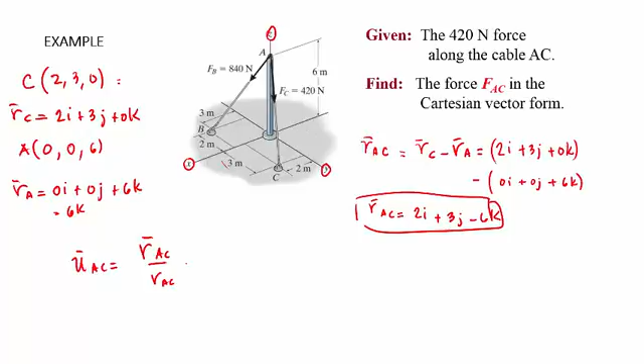Now I need the unit vector in that direction. U_AC would be that vector AC divided by its magnitude. So here I have 2i plus 3j minus 6k divided by the magnitude, which is the square root of 2 squared plus 3 squared plus 6 squared. This gives 2 over 7 i plus 3 over 7 j minus 6 over 7 k.

So this is my unit vector in the direction AC, and my force goes in that same direction. So my force vector would be the magnitude of the force along AC multiplied times the unit vector AC. This would be 420 times 2 over 7 i plus 3 over 7 j minus 6 over 7 k, and of course these are in newtons. So my vector is 120i plus 180j minus 360k newtons.

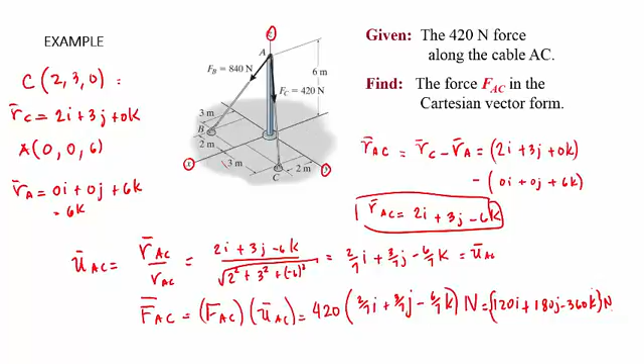So that's the first thing. Remember, whenever you don't have the vector but you have the magnitude, you look for a vector in the same direction as the force, find the unit vector, and then multiply the unit vector times the magnitude to get that force vector, okay?

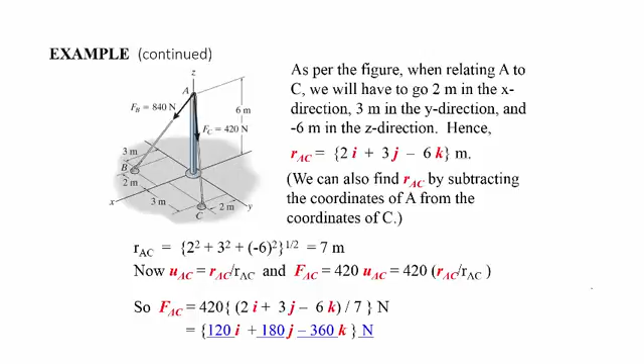So here is the problem written out in a nicer, handwritten form. Now we're going to talk about the projection of the vector, which is different. In the case of the projection of the vector, this should also be a vector. What we want is the magnitude of the projection of the vector along a line specified by this unit vector.

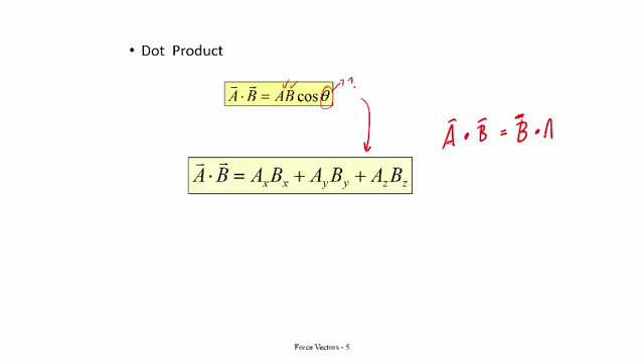So let's see what is the definition of a dot product. It can be the magnitude of A, B times cosine of theta, but you have to know this. If you don't know it, then you go to this: A dot B, and that's the way it's read, it's not multiplication, it's going to be equal to AX times BX plus AY times BY plus AZ times BZ. A dot B equals the same as B dot A, so it's commutative.

I want to explain this with an example. Let's say I have this problem, and here is my force vector because I already have the magnitude and the direction. Now what I want to know is, what is the force, or the magnitude of the projection of the vector along this line that goes from A to O. This is a very important concept whenever we have to choose the type of material, or see the forces that are exerted. Remember, it's like when someone pulls you from one place, you will feel those forces in other places, like when you work out and realize you have muscles you didn't know you had. So that is the goal of this discussion: to see how forces are projected onto other surfaces, not necessarily in the same direction as the force.

So what we need to do in this case is find the position vector from A to O. The force along A to O is the dot product of the force vector dot RAO. So let's do this first part.

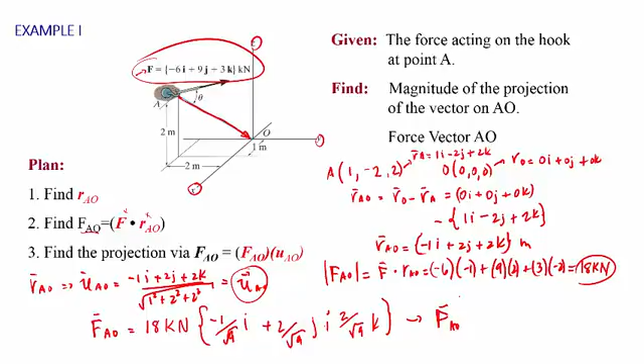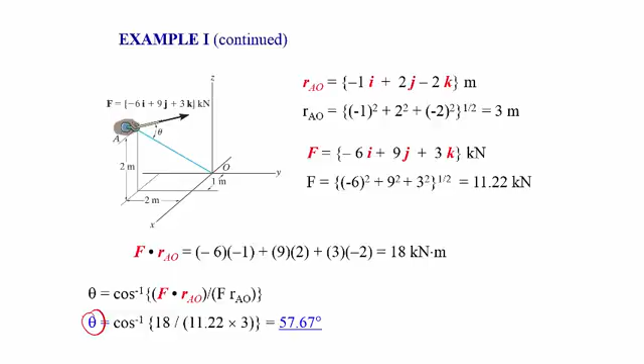So this is a little nicer established here, and then in this case, if you wanted to know what is that angle, then you can find it.

Okay, so now let's talk about the cross product. Remember, the cross product is to determine the moment of a force in 3D, because in 2D we just do it in scalar, and then we say the sum of the moments, and we talk about the positive or the negative.

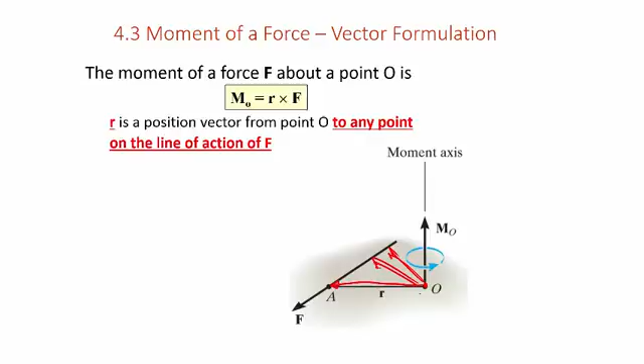But in 3D it's not so easy, so we use the cross product. The moment of a force about point O would be R cross F, where R goes from the position where you want to calculate the moment, and it's going towards the force. Remember, it doesn't matter where you use the cross product, it can be any point from that point to any point along the line of the force, and that is the cross product.

The cross product, using the right hand rule, gives you the direction of the moment. What's important is that in the case of the dot product, it was commutative, but in the cross product it is not, because it gives you a negative number whenever you switch directions. This goes from A to B, and this is your thumb, so that gives you the direction of the moment. Then this is from B to A using your fingers, and gives you a negative.

So if we look at the cross product, all these are bold, so these are vectors. Calculating the cross product, you do the determinant with i, j, k, ax, ay, az, bx, by, bz. But remember, the cross product is R cross F. So then you have rx, ry, rz, and here you have fx, fy, and fz.

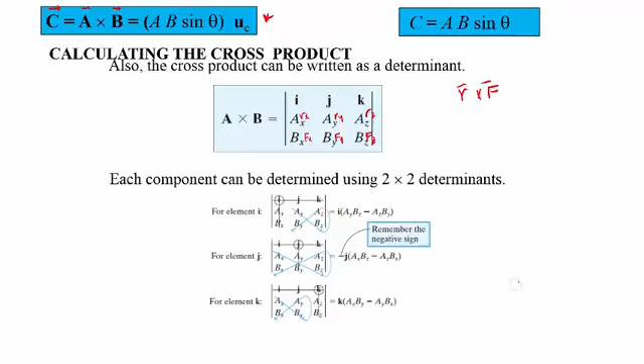Okay, and remember how it's solved. Here you have the i, and then you have a negative number, so you should remember that. And if you don't see it well, then let me just erase this here, and you can pause the video and make sure that you have that correct.

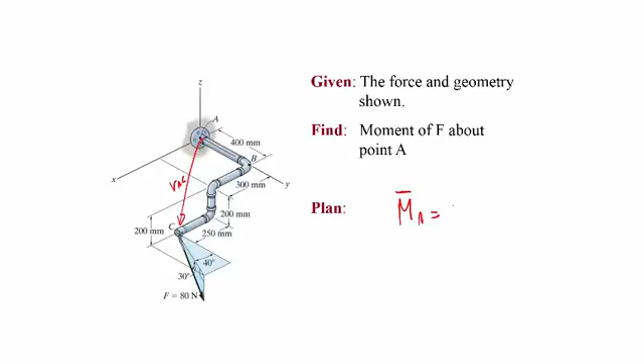In the case of the cross product, like I mentioned, I'm not going to do this problem, but let's say you have to calculate the moment of the force about point A. So you can go from point A, find this R A C. So the moment about A here would be R from A to C cross F.

And then here you have a magnitude, so you would have to find the force multiplied by the unit vector in that same direction to have the force vector. Remember that this is a vector. So if I asked you what is the magnitude, this would give you MAx i plus MAy j plus MAz k. So the magnitude would be MAx squared plus MAy squared plus MAz squared, and this would be the magnitude of that vector. So I hope that is clear.

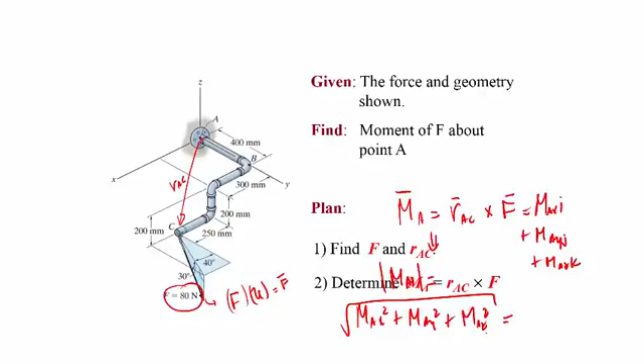Now we're going to see the analogy of a projection of a moment across an axis that is not necessarily x and y. It's the same concept as the projection of a force along a line that is not x and y. So you have your moment, and let's say that you want it along a line that is AA.

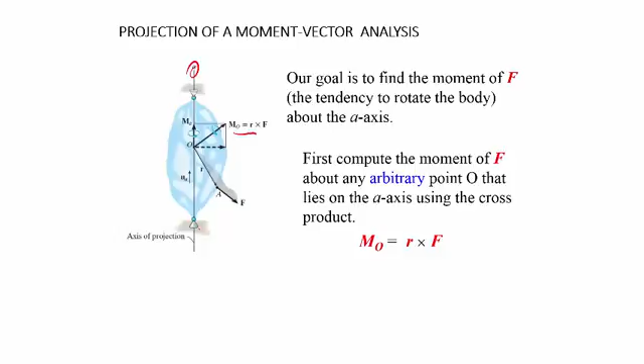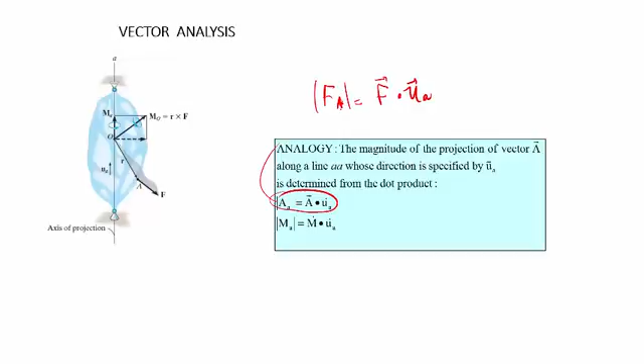The first thing you have to do is compute the moment of the force to have that value. And then once you have the moment of the force, the same way that we looked at the magnitude of the force, like we had this FA was the same as F dot UA. If you don't remember, go back to the third or fourth slide from this presentation. So the case for the moment is the same.

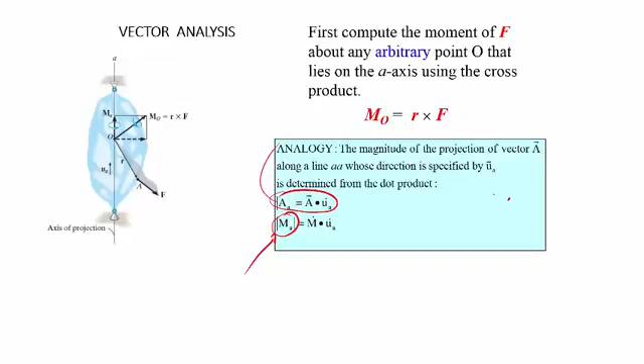Now we're going to use the same concept, and remember that what you get here is a magnitude. So the first thing you do is calculate the cross product, and then you apply the dot product for the projection. So you do R cross F, and then you calculate the moment, and then the projection of the moment along line UA. And remember, this is not bold here, so it's magnitude.

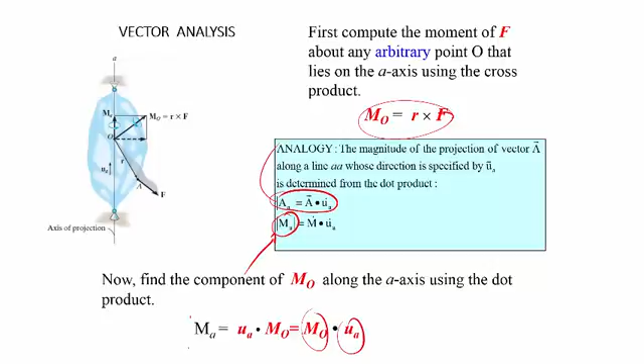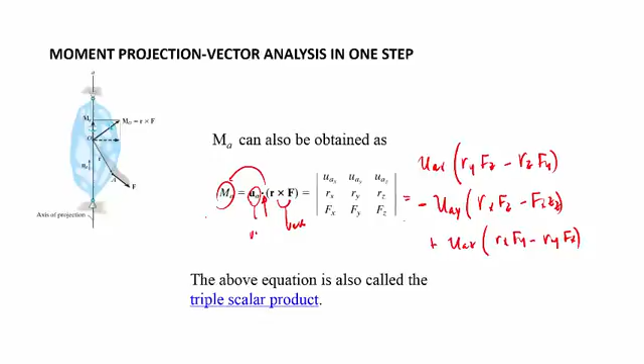So let me show you this particular example. What I did here was this force, I already have it here in vector form. If I look at this force that equals 200 newtons, it has to be equal to the square root of 100 squared plus 100 squared plus 141.4 squared. So it's related, right? And you should remember that. Let me erase it, and remember you can pause this anytime.

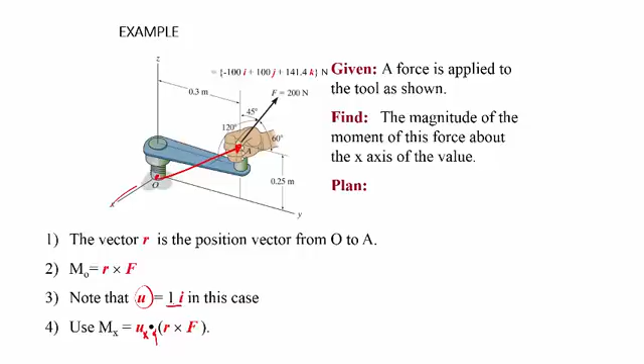So here I have the force, and the question is: what is the magnitude of the moment of this force about the x-axis? So we do first the cross product from any arbitrary point—it's always good to do it from here. So we'll do the cross product, R cross F, and then you can do the dot product, which is here, with UX because in this case it's along the X-axis, so this is the vector 1I, 0J, 0K. Let's do this.

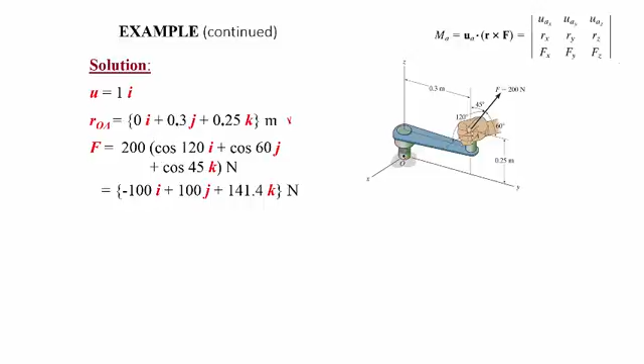So I have here, and I don't want to go over the position vector, so that's why I'm showing this. The position vector from O to A, which is this point where the force starts here—so I use this point along the force. This is my vector R-OA, this vector here: 0I plus 0.3J plus 0.25K meters. This is my force vector.

And so we're looking at the projection along this—this is the unit vector in this direction. So I will find the magnitude of the vector, and this should say x because it's along the line x. And so this is solved. Remember that I put this here because this is the vector along which you want to look at the projection. So it was 1, 0, 0, and then the R, which is the position vector, is in the second line, and then of course the force vector. So this gives me the magnitude of the vector.

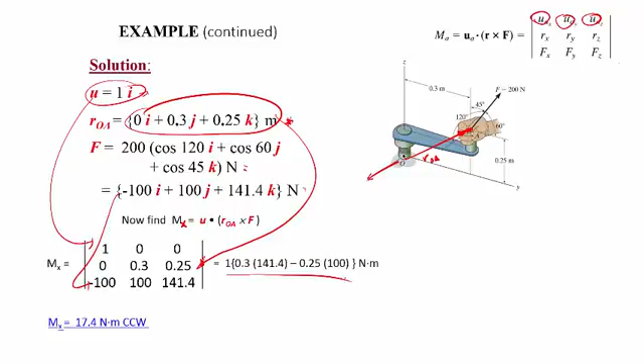Now, what if I want the vector? Remember, this is the magnitude, but for the vector, it's the same thing as before. So if I have this magnitude of the vector and I multiply it times the direction of the vector, then it will give me the vector for that moment. In this case, you need to be careful because whatever sign you get here also will define your vector. So 17.4 is the magnitude, but then I want it in this direction: 1I plus 0J plus 0K. This is in Newton meters. So in this case the vector is 17.4 I Newton meters, which makes sense because I had only the I component, but if I had a different vector that was not I, this would be the case.

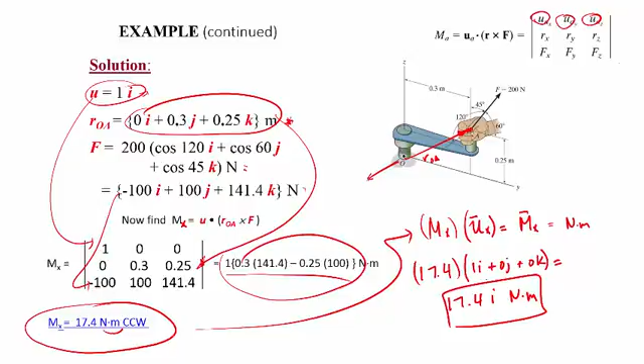Okay, so having said that, let's do problem 2. Finally, we're getting to problem number 2 of the exam. So the first question is: which of the following equations correctly evaluates the scalar triple product of 3 Cartesian vectors r, s, and t?

The first thing you need to remember is that because it's a triple scalar product, this is a dot product, so these c and d are eliminated because these are vectors. So I need to choose between these two. So if I have this here, then I look at my answers and I see, okay, well, there's a plus here and that doesn't make sense, but let's see.

So what we have is, if you have Rx, Ry, Rz, and then Sx, Sy, Sz, and this was given in the exam, and then you have Tx, Ty, and Tz, right?

So we do Rx, and then this would be Sy, Tz minus Sz, Ty, and then you have a negative here, so it would be minus Ry, and then I have Sx Tz minus Sz Tx, and plus Rz, and then you have Sx Ty minus Sy Tx. So whenever we look, then the answer is A.

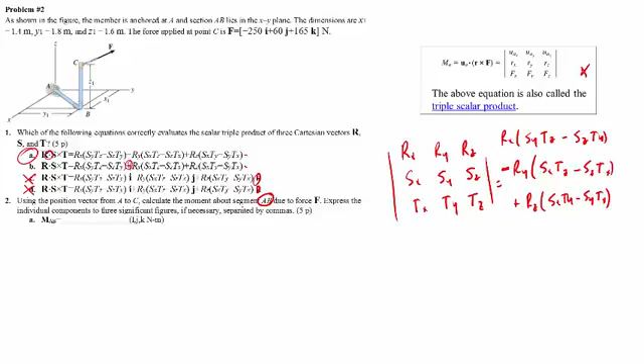So now the next question is, using the position vector from A to C, calculate the moment about segment AB. So I'm telling you which projection I want. Okay, so I'm going to calculate the vector. This would be like the moment about point A, right? I'm going to calculate this, but then look at the projection. So this puts together everything that we have learned.

Something happened here, I apologize. Okay, so what we're going to do is then have this vector calculated. But remember, first we have to calculate the magnitude of the vector. So if I have coordinates, so I need coordinates in A, B, and C. Okay, let me erase this here so that... didn't work. Okay, so I have coordinates A, which are of course 0, 0, 0.

I have coordinates B, which are 1.4 in X, 1.8 in Y, and 0 in Z. And then I have coordinates C, which are 1.4, 1.8, and 1.6. So I'm going to look at my vectors, and my vector B would be 1.4i plus 1.8j plus 0k, and then my vector C would be 1.4i plus 1.8j plus 1.6k.

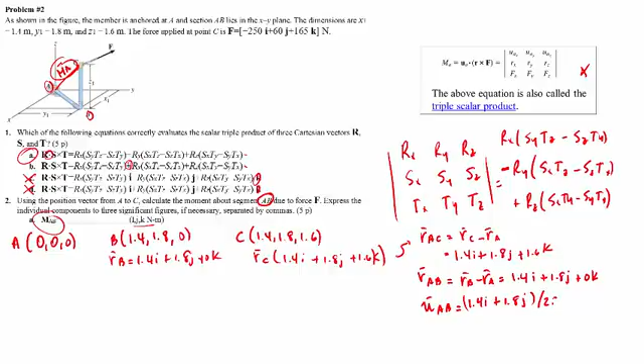Okay? So I can do the RAC cross F, I already gave you the F, and then this would give me the moment about A, and then if I want the projection along AB, then I do the dot product. This is the vector MA dot UAB. But I'll do it in one step with a triple scalar product.

So the moment AB is going to be UAB dot R, and this is RAC cross F, and these are vectors as well. So this would be 0.614, 0.789, and 0, and then 1.4. So this is what's here.